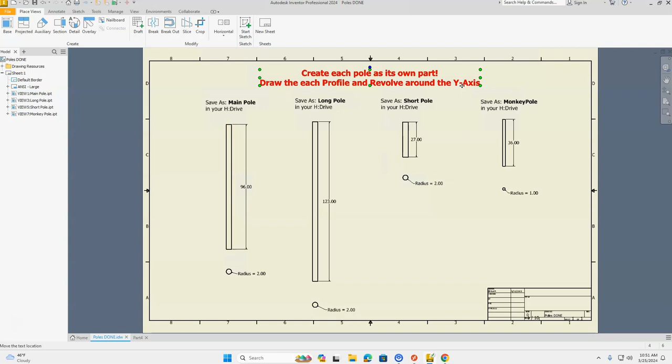We're going to click the green check mark, Finish Sketch, and go up to my World View Cube here and click on my Home button to get everything into view. Going back to my part, our main pole is what we're working on, 2 inches by 96, and we're going to use our revolve to revolve the profile around the y-axis. Let's take a look at how to do that.

Going up to our Create, instead right next to the Extrude, we're going to select our Revolve option from the ribbon bar. So let's click Revolve. It should automatically highlight and select your rectangle that you created. You can see that it's done because it's highlighted blue. If nothing is selected, you may have to click Profile and then click that shape that you drew.

The next thing we need to do is select an axis to rotate around. So I'm going to click the next one where it says Select Axis, and come over to the left hand side of the rectangle I drew, because this is the origin down here. This is my y-axis, so I'm going to click that, and it's going to spin it around the y-axis there. I'm going to select OK and show you what we should end up with.

So now we have our pole. It was our 2 inches, and it swooped around in order to give us a 4-inch total diameter, and we're still 96 inches long.

Okay, this part is done. We're going to go up to the top, orange file, go down to Save As. I'm going to make sure that this is in my H drive, first initial last name 000. If you don't see your H drive here, click on the pull down menu, and it should be the last one in the bottom of the list. First initial last name 000. Yours is going to look like this.

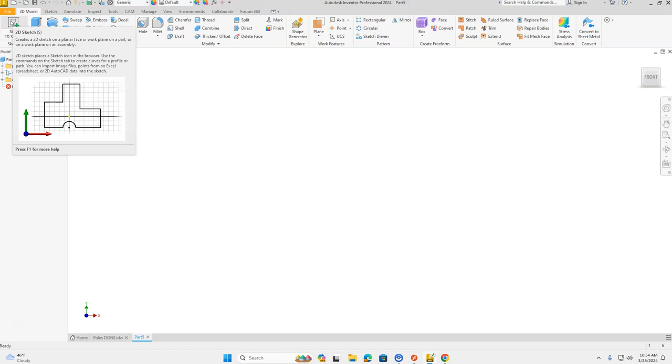Okay, so let's start our long pole. We're going to go File, New, Standard IPT. We're going to use our 2D sketch, the drawing with the green plus mark, and we're going to select our XY plane. Click Front in your World View Cube to zoom all, and we're going to get our rectangle tool again.

Now, before we start our drawing, our horizontal dimension we're going to type in for this rectangle is 2, because it's a radius, and when we revolve it around it'll end up being a 4-inch diameter. So the radius is 2, and our height is going to be 123 inches. Let's go back to our drawing.

So I'm going to get my rectangle tool. I'm going to start at my green dot origin, click, stretch out a rectangle. Okay, now I'm going to take my hand off the mouse and type 2 for my horizontal dimension. Press the tab key on your keyboard and 123 inches. Press enter on the keyboard.

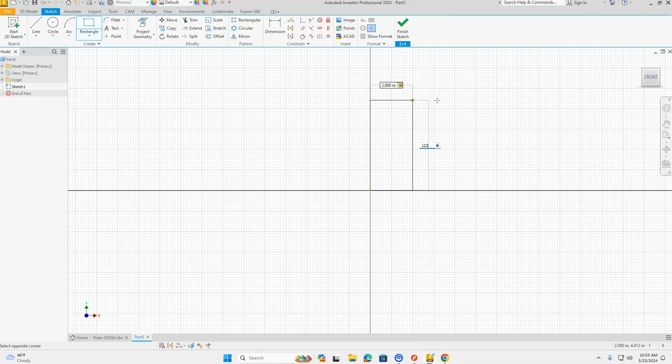Click Front in your World View Cube, and you can see I still have my rectangle tool here on my mouse, so I'm going to press the escape key to let go of that. And just to confirm, we have our 2-inch dimension at the top, 123-inch dimension for our height or our length. That looks great. It matches our drawing.

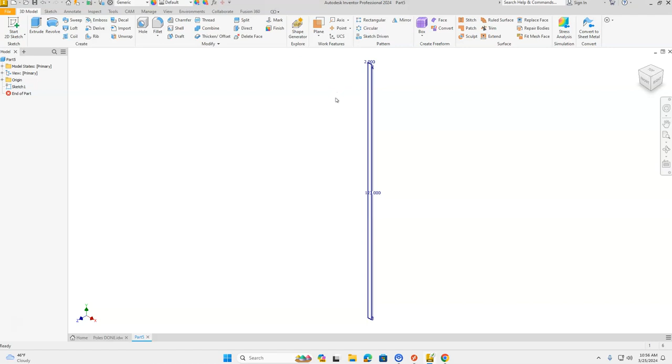Green check mark, finish sketch. Let's go to our home view by our World View Cube so that we can see what we're working on here. Once again, we're going to revolve this part, or this rectangle, so we're going to click our Revolve tool.

It should automatically select your drawing. You can see that it is selected because it's highlighted blue. If it doesn't automatically do that, you need to click your drawing inside the rectangle here. And the next thing we need to do is select our axis. Once again, we're going to choose our y-axis, which is the long side of this rectangle, going vertically.

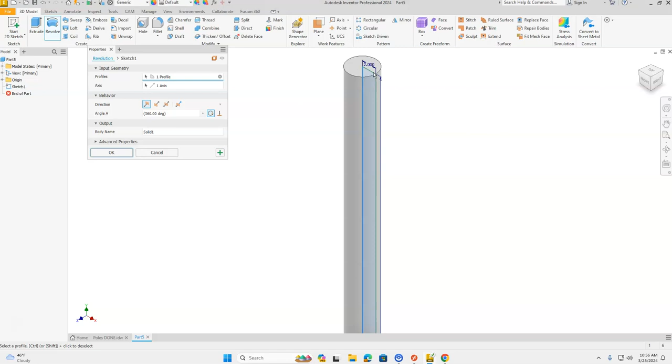And you can see that it revolves it around. If you take a look, I have my 2-inch radius, and when it sweeps it around with that revolve, it ends up being double that, which is going to be a 4-inch diameter. Okay, I'm going to go home again. I can also see that I'm at 123 inches long.

Click OK. Let's go up to the top, orange file. That long pole is complete, so let's save it by going to Save As. Make sure you're once again in your H drive, first initial last name 000. If this does not automatically pop up for you, click on the pull down menu. You're going to go down to your H drive. It should be the last one that's in the list.

Part number 5 is not a good name for this. If you take a look at our drawing, this is called the long pole. So we're going to change that file name to long pole, make sure we're in our H drive, and click Save.

I'm going to X out of this part. Now we're on to the short pole. This has a radius of 2, length of 27 inches, and it's going to be called the short pole. Let's get started on creating that part. We're going to go up to the orange file in the top left hand corner, select New, Standard IPT, click Create.

2D sketch, the drawing with the green plus mark on our XY plane. Click Front in our World View Cube. Once again, we're going to choose our rectangle tool, and we're going to start at our origin. Once you get your green dot, click, let go of the mouse click, and stretch out a rectangle.

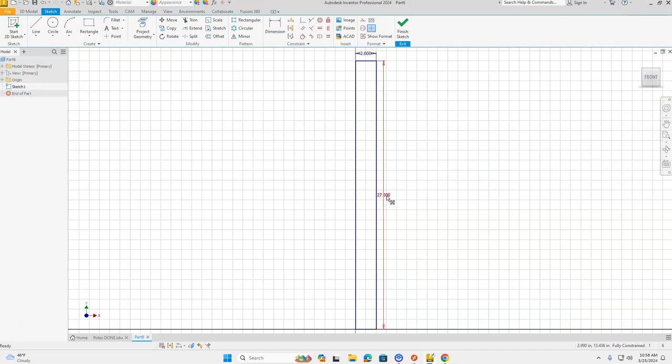Our radius for our horizontal dimension is 2. Press the tab key on the keyboard. The length of this rectangle is going to be 27. Press enter on the keyboard. Click Front to see what we've created. So we have a part that's 2 inches by 27. Green check mark to finish sketch.

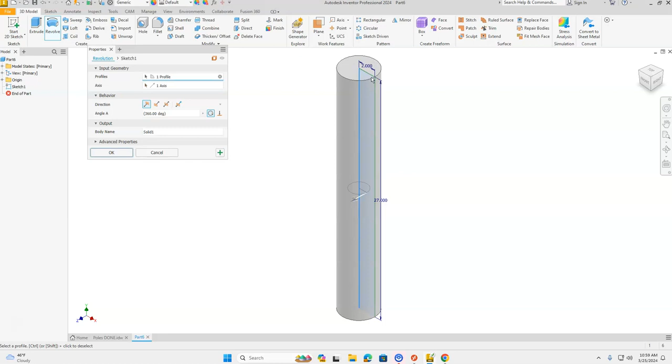By your World View Cube, click Home to see what we're working with, and we're going to revolve once again. Select your y-axis, and you can see that part spun around to give us that 4-inch diameter we're looking for, and it's 27 inches long. Click OK. Now let's save this part.

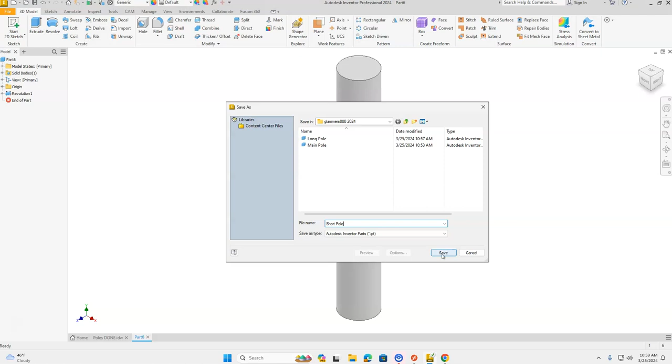We're going to go up to the orange file, go down to Save As, ensure that we're in our H drive, first initial last name 000, and part 6 is not a good name for this, so we're going to highlight that and change it to Short Pole. Once we have it titled Short Pole and in our H drive, click Save, and now we're on to our final part.

Our final part that we're working with is our monkey pole. This is for our monkey bars and monkey ladder. The monkey pole has a 1-inch radius and it's 36 inches long. So let's start by creating this part.

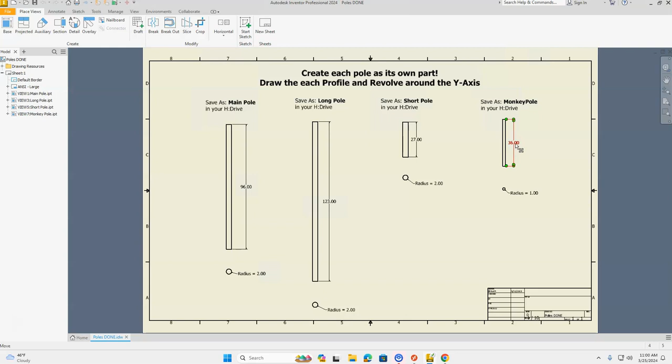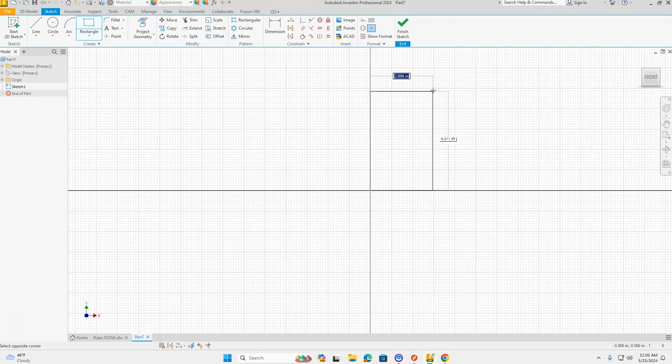Go to Orange File in the top left hand corner, down to New, and choose Standard IPT. 2D Sketch, the drawing with the green plus mark, and we're going to select that for our XY plane. Front in your World View Cube, click your rectangle tool, start at your origin when you get your green dot, stretch out your rectangle. Now remember, this one had a radius of 1, so for our horizontal dimension at the top, we're going to type 1, press the Tab key, and then the length of this rectangle is 36 inches. Press Enter on the keyboard.

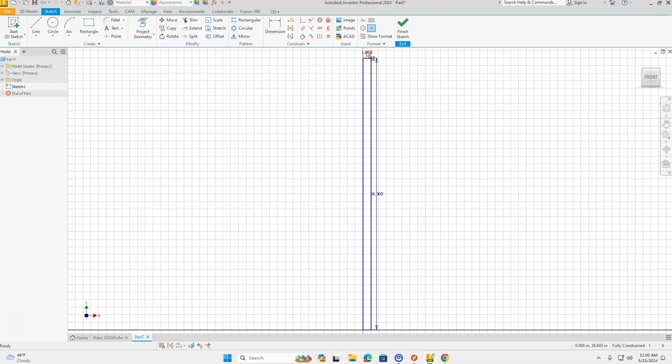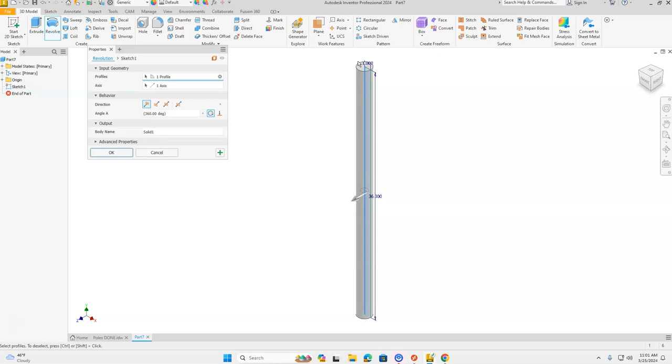Click Front in your World View Cube. You can see we have 1 inch by 36. Green check mark, finish sketch, and now we're going to revolve this around the y-axis again. We're going to select our revolve tool. My shape highlights blue so I know it's been selected, and then I'm going to select my y-axis. It revolves around our y-axis, click OK.

We have this part created, so now we're going to go up to the orange file, down to Save As, make sure we're in our H drive, and we're going to change that file name to Monkey Pole. Once we have it in our H drive and the name changed, click Save.

Great job. You created the 4 poles that we need for our Inventor playground. We'll see you next time for our next installment, the crayon pole.